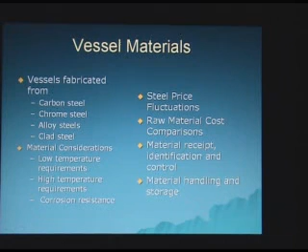These slides we took from a vendor. Those are the basis that they consider - whether the steel price is fluctuating, and then they do a cost comparison. Material received is when they receive material - how do they identify it, how do they control it, and then how do they store it.

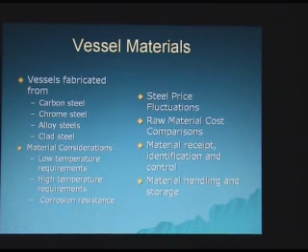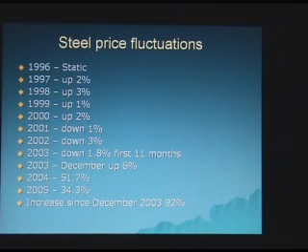Because during those times, basically businesses were down, they didn't have much business. Then after 2003, you can see it ramp up quite a bit. From 2003 to 2004, there's a 50% increase. I actually worked on a job - we bid in 2004, and by the time we issued a PO, all my cost estimates had gone up 50%. In 2005, it went up again, and now this chart is pulled from last year, I believe. Yeah, 2005. So I would say from 2004 to now, probably double, just on the base material cost alone.

This is a cost comparison showing 516-70, which is a plain carbon steel, and then 1 1/4 chrome, 2 1/4 chrome, 5 chrome clad stainless steel, and also duplex, Inconel, Monel, Hastelloy. Is this the most recent price? This is the most recent? No, this one is also pulled from last year. Right now, probably, I would say it's gone up 30-40% easy.

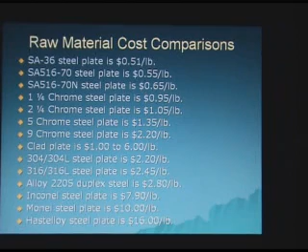All the material that comes into the shop has its own identification. The mill provides the identification, called the certified material test report. When they fabricate that raw material, they have to do all kinds of testing. They have to provide the chemical composition and the mechanical testing. So they do all kinds of tests in the mill already.

But when you receive it, you still want to make sure whatever we spec out, they meet our spec.

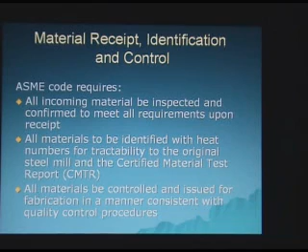After they receive the material, they have to mark it - this plate is for tag number such and such. When they receive a bunch of nozzle flanges, they have to cover and protect it. Before they start rolling and cutting the vessel, they make it like a kit, like a head - you'll see this in the next slide. They take the head, punch a hole, and fabricate individual pieces. Then at final assembly, they put it all together.

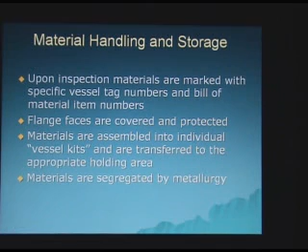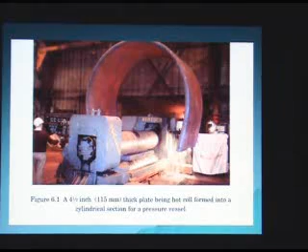This slide shows the process toward final assembly. This is a roll machine, a roller. When the plate comes in, it comes in as a flat plate. This one is a hot roll - usually they do the hot roll on a very thick plate, not on a thin plate.

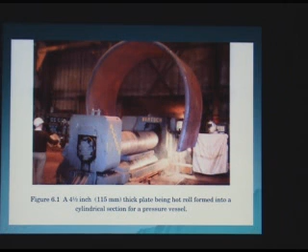Here's another roller, a hot roll machine. When you do the cold roll, at the edge they have to break it a little bit - they use a smaller roller to press it so they have a lead. They take the lead into the bigger roll, so they roll it to the required diameter.

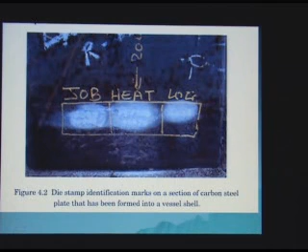Here's the identification I mentioned earlier. Here's where they store the piece after they roll it. The rolling machine guy keeps rolling, and after they roll it, they set it aside out in the yard.

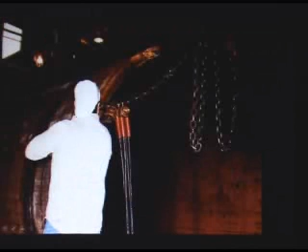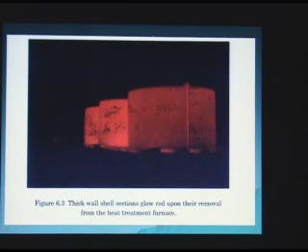Now they brought it in - this is a heavy wall section, brought back to the shop. This one just came out of the furnace. Earlier they showed you the hot roller - they have to take it to the furnace and heat it up to like 1600 degrees Fahrenheit, which makes it easier to roll.

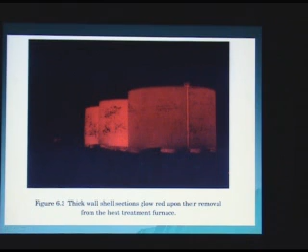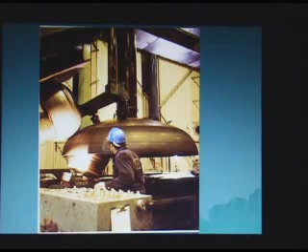Here's the head spinning machine. The way they do this is they take the plate, slowly press it, and then spin it.

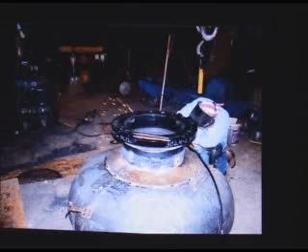Here's another storage area in the backyard. Remember earlier they said they fabricate in a small kit - they take the head, punch a hole, and install a nozzle. Here's the same thing - they install a nozzle on the head.

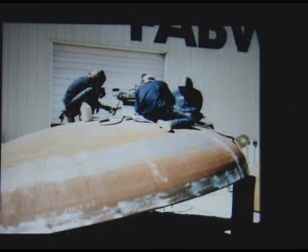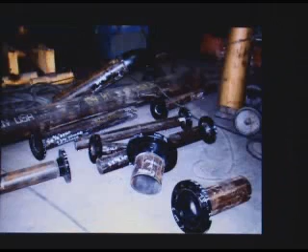These are the components that come into the shop - these are the nozzle components, these are the long weld neck, and more components.

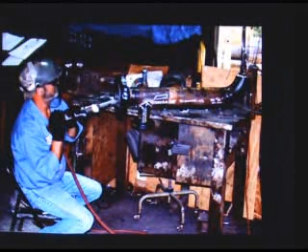Earlier I mentioned some vessels have to be overlaid - either we go to clad or we overlay. When you order small components like a small nozzle, they don't come in as clad, so they have to do it in the shop. They take the weld rod and just weld it in.

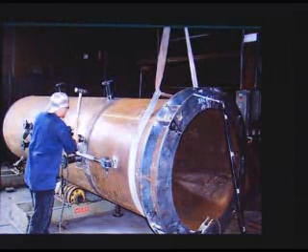Now here is the. Did we skip that? The welding process? No, Oh, okay.

This slide shows them welding the pieces together, the two shell courses together.

Is that guy with a hammer? I'm sorry. Is that a hammer he has in his hand and he just banging it? No. Actually, he's holding the torch. Yeah, he's holding the torch.

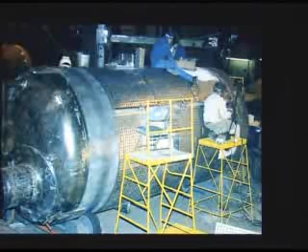In some cases we have to refractory line it, and these are the mesh for the refractory line.

Now this is almost complete. Remember they put all the pieces together, and the next step is putting in the insulation anchors.

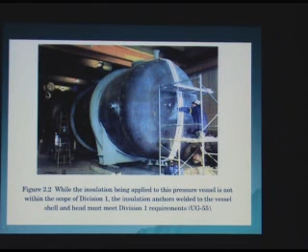Go ahead. Also with the skirt of the vessel. Say that again? Do you also work with the vessel skirt? Besides the vessel itself. Yeah.

They attach the skirt later. I came across a scenario where the vessel is made of carbon steel with a 1/8 corrosion allowance, but the vessel skirt is defined as just plain carbon steel without the corrosion allowance. That's correct - basically the skirt just sees the environment, there's no fluid, there's no corrosion there.

What about for some of those alloys or other types? Well, we manufacture a vessel with the alloy for a reason, either for corrosion or for temperature. But the skirt - why do we have to spend money? You probably saw the cost comparison between the SA36 and the chrome, it's like 10 times. But don't you have any problem in terms of differences in metals that you have?

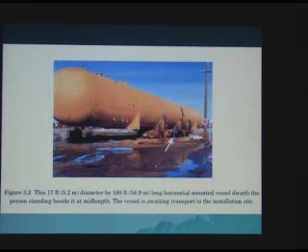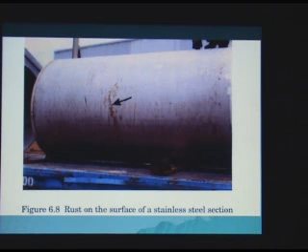Now, welding process - this isn't my expertise, but we do have to get involved in what kind of welding process they're going to use, what kind of weld procedure they use.

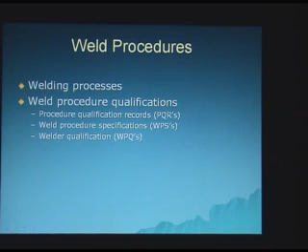Basically, most of our vessels are manufactured based on these five welding processes. The first one is submerged arc. Second one, flux core - flux core and submerged arc are almost the same, except flux core can do automatic welding faster. Submerged arc also does automatic, but flux core is faster.

Then we have shielded metal arc welding, which is a stick process. They use a stick in hard to get areas, or whenever they fit the nozzle into the pressure boundary, into the shell or head. And the MIG - gas metal arc welding - in other words they call it MIG. Then we have TIG.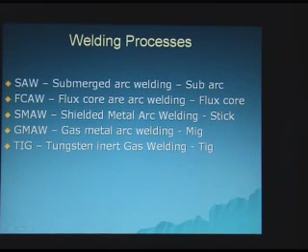Now, this is actually a submerged arc process.

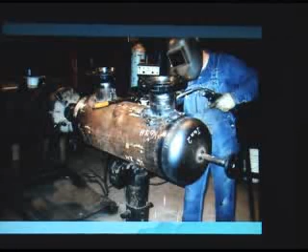On the pressure boundary, we do welding from inside and outside both. Inside, what they do is take a can and stick a boom inside, and that boom travels - it's an automatic machine. In other words, if you want to weld the circumferential seam, they stick a boom inside and then roll the can. That's how they weld inside.

Okay, this is a slide showing them fitting the nozzle into the can.

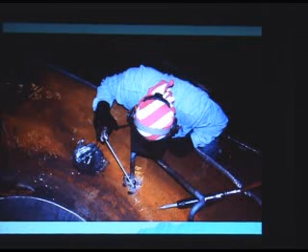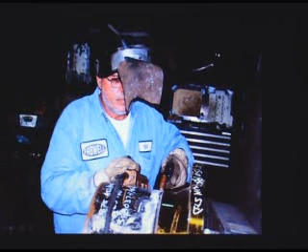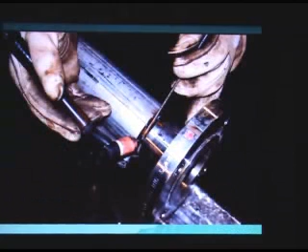What are you doing here? Same thing - they're welding a flange onto the nozzle neck. And this is actually a stick process.

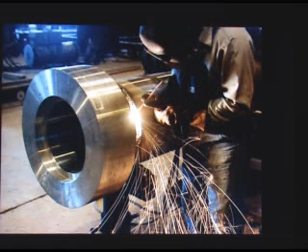Yeah, next one - this is also a nozzle. We probably have a lot of repeat slides.

Now, weld procedure qualification. Anytime they weld a pressure vessel shell or head, they have to go by the procedure, and that procedure has to be qualified. Basically, the PQR qualification means you take a piece of coupon of a certain thickness, same material - SA516-70 or stainless steel. Then they weld it as a sample, and the welded sample has to be recorded: what kind of heat they put in, what kind of weld rod, what kind of process, either SAW or SMAW. They record those, then take that coupon to the lab and do the bend test, the shear test, the tension test, all kinds of tests, then record it before they actually use it on welding the vessel.

Now, weld procedure - is that done before every job, or done once? No. Every shop, if they want to be in the pressure vessel business, they have to do those, just like going to McDonald's.

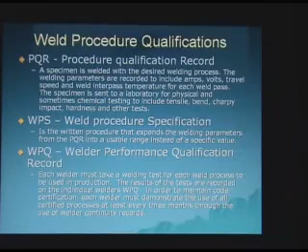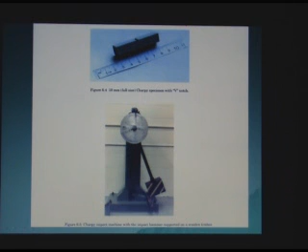Now, this is a Charpy impact test machine. Up there's a coupon, a sample piece of plate, and they have to test it for brittleness, to see how brittle this steel is. Here's a coupon, and those notches you see are small notches meant to lead, so it will break at that notches area.

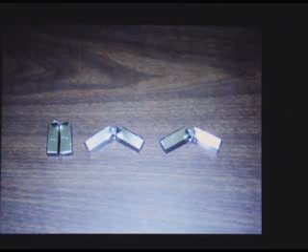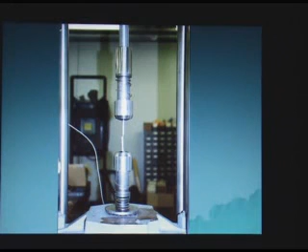Now here's another impact machine, and here's the broken pieces after they tested. And this is actually a tensile test. After they did a tensile test, they put it on a machine to pull it and see how much force they put in before it breaks. Here's a tensile machine. And this is actually a bend test.

Now, vessel quality control. In the shop, they have to have a quality control plan, so whatever you buy, you want to have a certain quality. And actually, inspection and test plan come later. Remember I said pre-qualification meeting, pre-fab meeting? That's the time that we went in, we went over all the specs, and the procurement guy usually tags along to go over all the commercial issues. And dimension verification comes later, before the final assembly is done, and that's why they do the dimension verification. And NDE is something they do along the way.

Number one, the most important one, X-ray. What we do X-ray for is to check the weld. They actually take the film and shoot the X-ray. Rick probably covered earlier whether it's 100% X-ray or spot X-ray. For 100% X-ray, they lay all the film behind the plate and then shoot the X-ray.

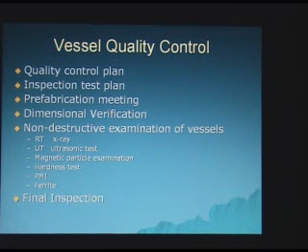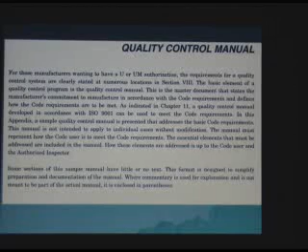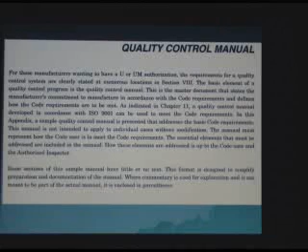So this is a quality control manual that every shop needs to have. When you walk into the shop, we did not cover the selection or the pre-qualification section. Earlier I talked about how do we know which shop is good, right? So when we walk into a shop, the first thing we want to see is, how good is your quality control manual, how good is your QAQC program. So that's when they have to have that program in place.

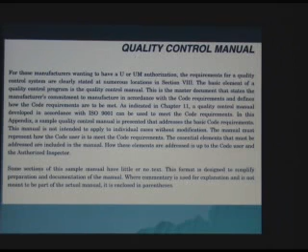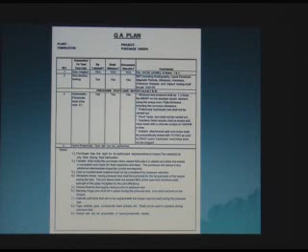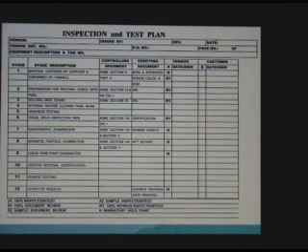Now, this is a QA plan for each individual job. Let's say I want this guy to build a column - they have to come up with a plan for how they're going to build it, and how they're going to test it, how they're going to inspect it. That's a plan. And this chart, we call it ITP, an inspection and test plan. That's like a roadmap - number one, I want to do this.